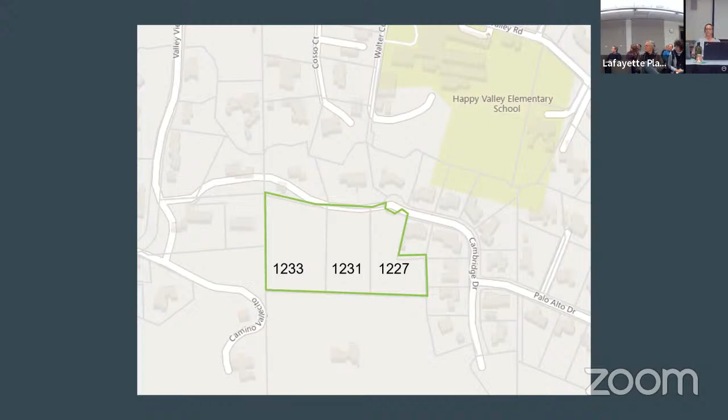Next slide. The first, westernmost site is heavily vegetated with large trees and shrubs, with a clearing towards the front of the lot, which is the north end. All development is proposed in this area at the north end of the lot, just off Cambridge Drive, and the lot slopes up from the roadway to the southwest rear corner.

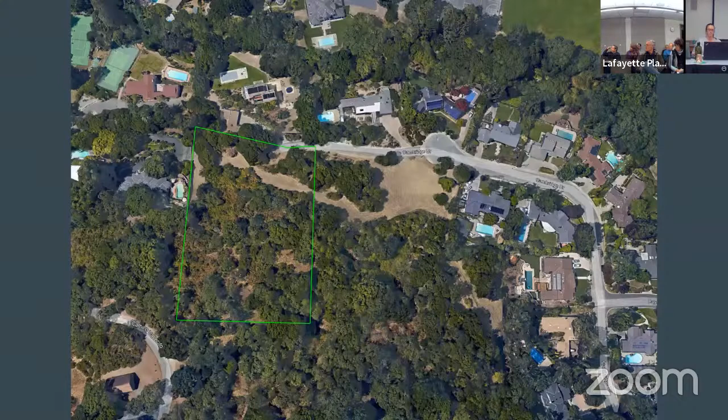Next slide. On this lot, the applicant proposes to construct a new 2-story, 4,637 square foot single-family residence with an 824 square foot semi-detached garage and a pool.

Also shown on the plans is a 780 square foot accessory dwelling unit, or ADU, which is not subject to discretionary review by the DRC and would be separately reviewed by staff once the applicant has received the entitlement.

Development is, as I said, concentrated toward the front of the lot, in a location which appears to have the least amount of tree removals required, and grading is minimized even though it is a hillside. The building placement also reduces the need to construct a very long driveway to reach the home, preserving as many trees on the site as possible. This orientation generally follows the contours of the site, which is recommended in order to minimize impacts to the hillside.

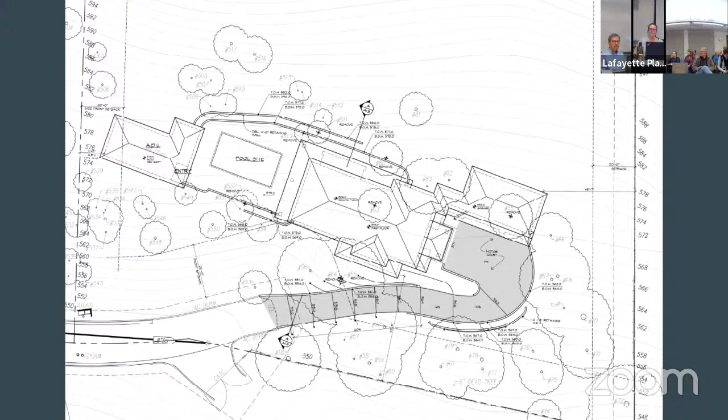Next slide. The development would require the removal of 8 trees, all of which appear to be protected species. On a vacant lot, any tree with a diameter greater than 6 inches is protected and requires a tree permit to remove. As part of the formal submittal, the applicant will need to submit a tree mitigation planting plan.

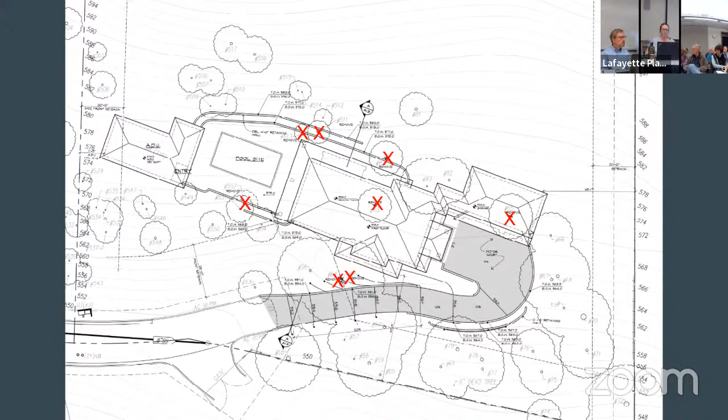Next slide. The applicant proposes a 2-story residence with 6 bedrooms and 6½ bathrooms. The first floor includes 1 bedroom, 1 full bathroom, and a powder room, in addition to the kitchen, dining, and family areas. Next slide.

On the second floor are 5 bedrooms, including the primary suite, with each bedroom having an ensuite full bathroom. The second floor is stepped back for much of the perimeter, which reduces the mass of the second story.

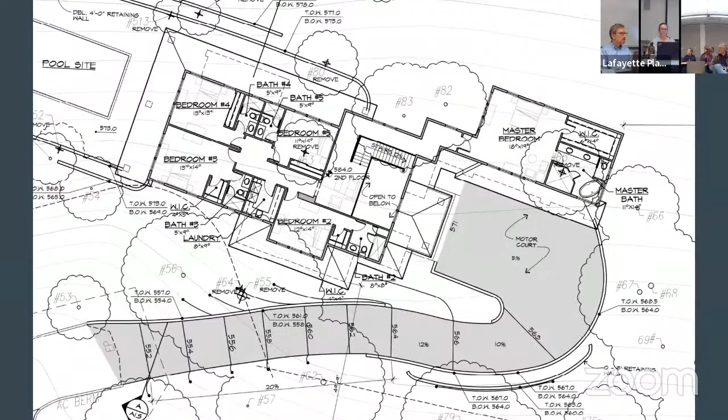Next slide. The apparent maximum ridge height is approximately 35 feet, calculated from this site section. That is the maximum permitted in the R40 zoning district. But with the formal submittal, the applicant would provide full building elevations, which would more clearly demonstrate the building's height and how the massing is broken up.

Although the second story is stepped back along the facade, as you can see in this site section, the building may still appear quite massive when viewed from the roadway due to the slope. Efforts to reduce the apparent massing should be made, and the applicant should also include trees for screening in their landscape plan.

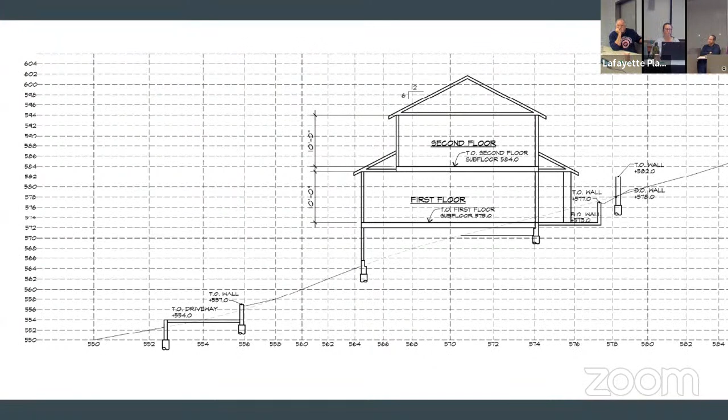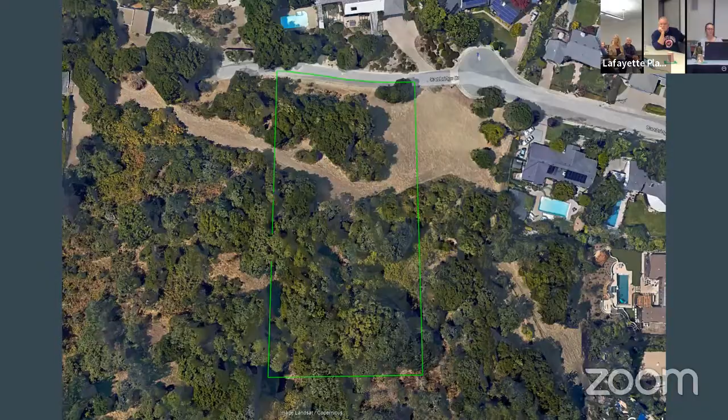I will now move on to the next parcel, SS0423. 1231 Cambridge is the middle of the 3 vacant lots. It is also sloping up from the roadway and is heavily vegetated with a clearing toward the front of the lot. Next slide. The proposed development includes a 2-story single-family residence of 4,329 square feet, plus a 615 square foot attached garage.

Also shown on the plans, similar to the one we just viewed, is an accessory dwelling unit, which would be subject to staff review at a later time. Construction of the driveway will require terraced retaining walls at the front of the property, and staff recommend including vegetation for screening and visual interest in the final landscape plan.

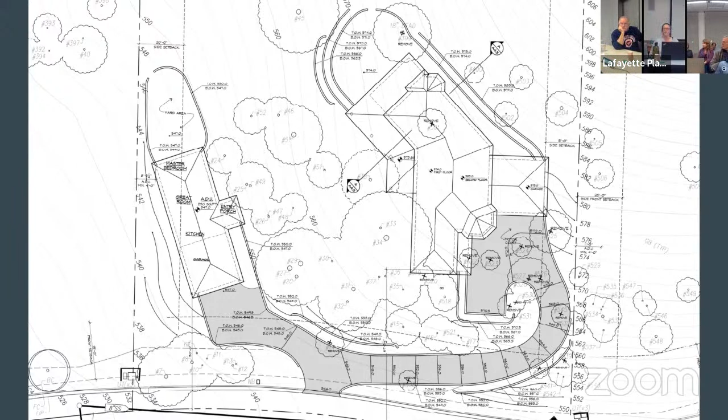Next slide. The proposal also requires the removal of approximately 15 trees. Some of these trees may be under 6 inches in diameter, and therefore would not be protected species, but an arborist report will be required along with the formal submittal, which would detail the condition and size of each tree in the vicinity of proposed construction. This would also include recommendations for retention of other protected trees on the site.

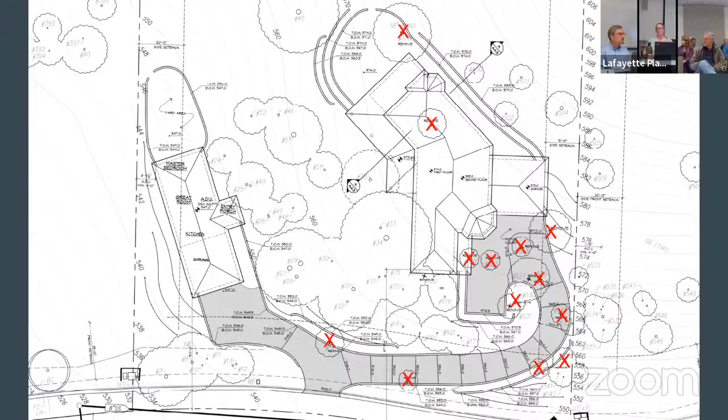In general, the siting of this residence also preserves as many trees as possible. It is a very heavily wooded site, and it does fit the existing contours of the site. Next slide.

The first floor includes an attached 1-car garage and a separate attached 2-car garage, as well as laundry, kitchen, living, dining room, 2 bedrooms, and 2½ bathrooms.

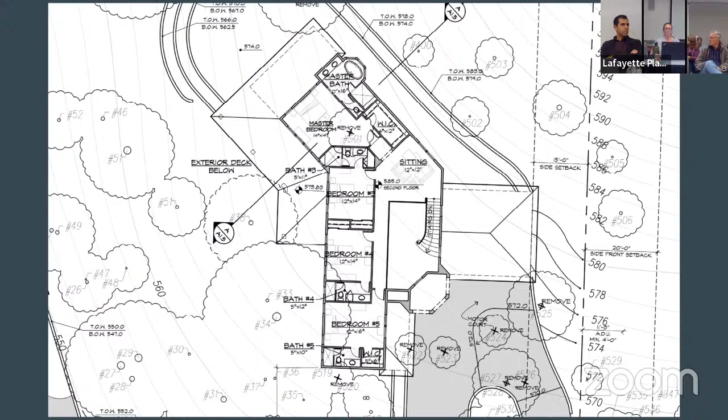Next slide. And the second floor proposes 4 bedrooms, each including a primary suite with a full bathroom as well. The second floor is stepped back, but at the rear of the residence, as well as over the 1-car garage. Staff recommendation is to explore ways to step back the mass at the front left corner of the residence, which is closest to the street, Bedroom 5 as shown on the floor plan, as that has the higher potential for visual impact when viewed from the roadway. Next slide.

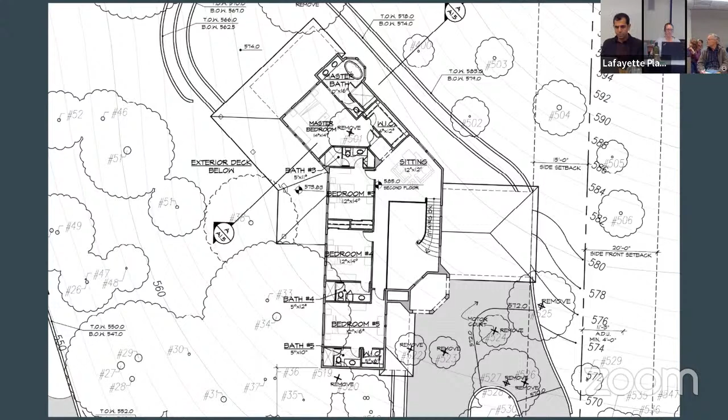This site section of the rear half of the house shows the maximum ridge height to be approximately 28 feet. This is consistent with zoning regulations, which limits it to 35 feet. However, the height will be more clearly shown in the full elevations when those are submitted along with the formal project submittal. Additional site sections may also be necessary for the driveway and parking area of the residence and to demonstrate the grading and slope in those areas.

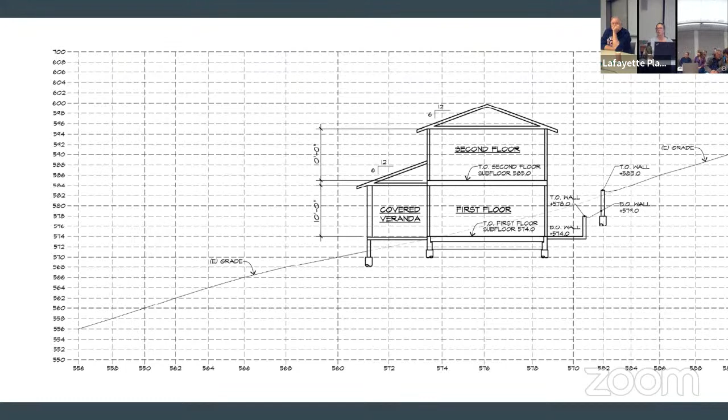Next slide. And finally, we have 1227 Cambridge. You can go to the next slide. The easternmost of the three lots. The northern portion of the site where development is proposed has relatively few trees and is fairly flat in comparison with the southern uphill portion of the lot. There is an existing curb cut for a driveway off the cul-de-sac of Cambridge Drive. Though the applicant proposes a new driveway entry to the west, I believe tonight, as part of their presentation, they may show an alternate driveway location as well from the cul-de-sac.

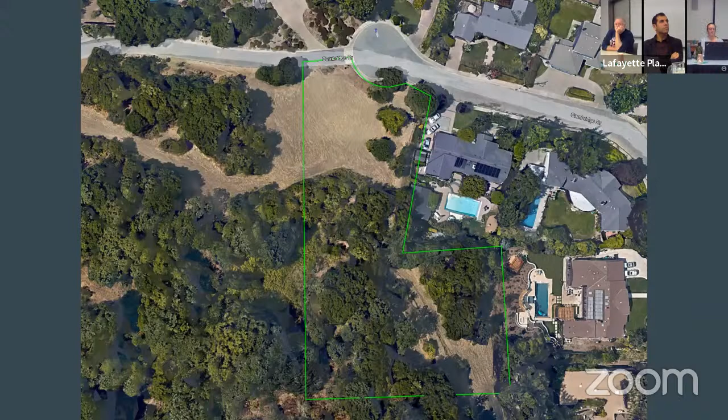Next slide. This proposal is to construct a two-story, 4,739 square foot residence, an 804 square foot attached garage, and a pool. An ADU is also shown in the rear yard of the residence, and this ADU will be subject to staff review once the project has the entitlements.

Of the 3 study sessions presented tonight, this residence is the closest to homes along Cambridge Drive, the public roadway portion of Cambridge Drive. It has the potential to appear more massive in relation to its surroundings because the homes to the left in this image, but that is to the east, are smaller lots with smaller homes, while homes to the west are larger lots with larger homes.

Staff would like to see the applicant reduce the scale of the proposed residence to create a transition area from these smaller lots with smaller homes to the larger lots to the west.

The project appears to only require the removal of 2 trees, and depending on their size, they may be protected species. The applicant proposes to install screening trees along the property frontage as well to create visual screening.

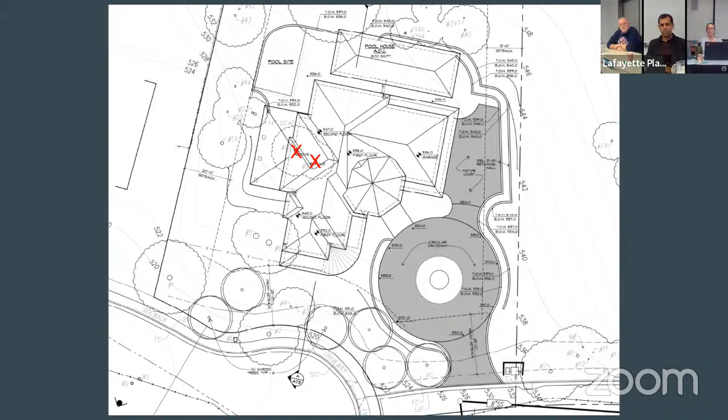To minimize grading to create the circular driveway as well as reduce privacy impacts, staff recommends the applicant explore relocating the garage to the front of the residence if possible. This would shorten the driveway and reduce the amount of windows overlooking the front property line.

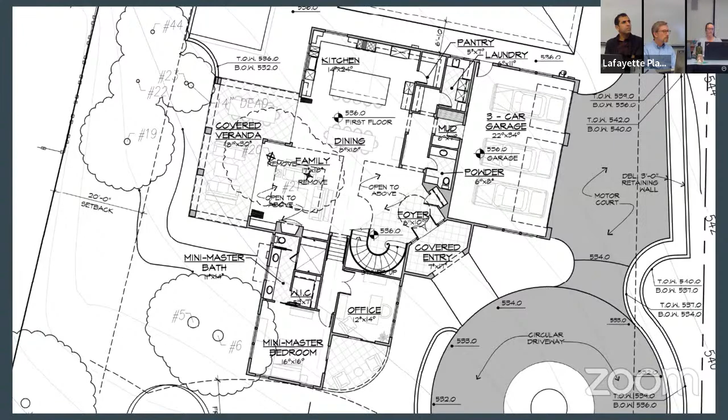The first floor includes a 3-car garage, an office, 1 bedroom, kitchen, dining, and living areas, as well as 1.5 bathrooms, while the second floor plans include 4 additional bedrooms, each with an ensuite bathroom.

Staff estimate the maximum height of this residence to be 35 feet based on this site section. But again, detailed building elevations will be required to determine the actual height.

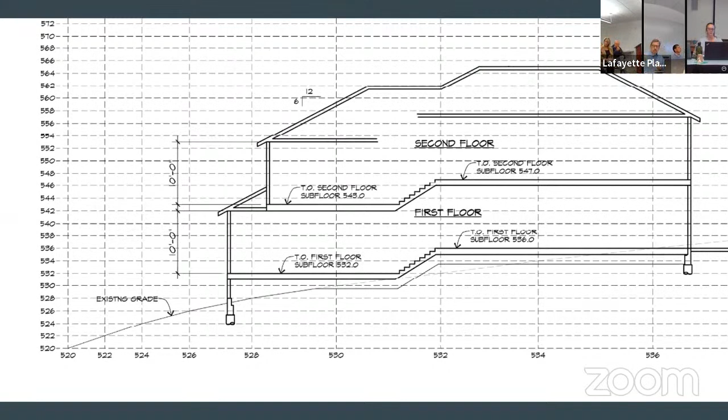The residence may appear very tall in comparison with the surrounding homes, given the slight slope at the front of the lot. Staff recommend reducing the apparent mass through either reducing the overall area of the second floor, adding more trees for screening, including additional architectural elements to add visual interest, or a combination of these actions.

Staff received 3 written public comments, which were published with the staff report. Common concerns regarding all 3 properties include drainage and slope stability, history of poor drainage in the area, the overall size of the proposed residences and whether they are in scale with the neighborhood, the desire to preserve as many trees on the site as possible, and concerns regarding emergency vehicle access or evacuation via Cambridge Drive from the additional development.

Staff expect the following permits will be required to process a formal application. The hillside development phase 1 and phase 2 will be required. Phase 1 is a siting and massing determination with the Planning Commission, and phase 2 is design review with this commission, DRC. This is because the property is a vacant property in the Hillside Overlay District, and that is the process for vacant lots.

Also likely to be required is a grading permit if they propose to remove, add, or grade more than 50 cubic yards, as well as a tree permit to remove any protected trees on the sites.

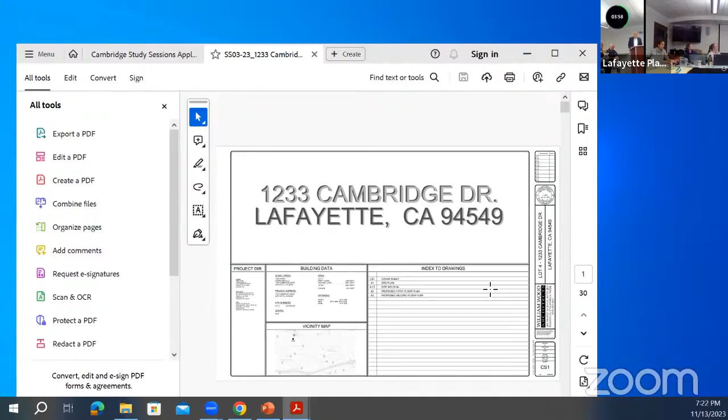There we go. So you'll see there are quite a few trees between the property line and the driveway. There's also a limit of 15% grade for a driveway for the fire department. So it's a delicate balance to get up to the building site, leave all the trees on the downslope of the property in front of the house, and use the driveway to help screen the house with existing trees.

Most of the trees around the perimeter are smaller trees, and I try to keep as many of the larger trees as possible. There's one tree where the garage is, and another right by where the driveway comes up to the main part of the house.

We didn't anticipate anything like ADUs at this point, but we're looking at possible sites for an ADU. I know the ordinance allows staff-level approvals, but it's important for neighbors and design review to see that if you're going to put an ADU in, you can make it a condition of approval where it's located. Many times when you come with an ADU you get free reign of where you put it in the backyard or side yard, as long as you meet the ordinance requirements. We only did this to show approximately where an ADU would likely be and what the size limitations are.

Lot 4 has the square footage currently proposed, or at least shown on the plan, reduced down—of course you'd get more space, and there might be a couple of trees you could save. Currently it's 4,600 square feet, and the FAR on lot 4 is 4.4%.

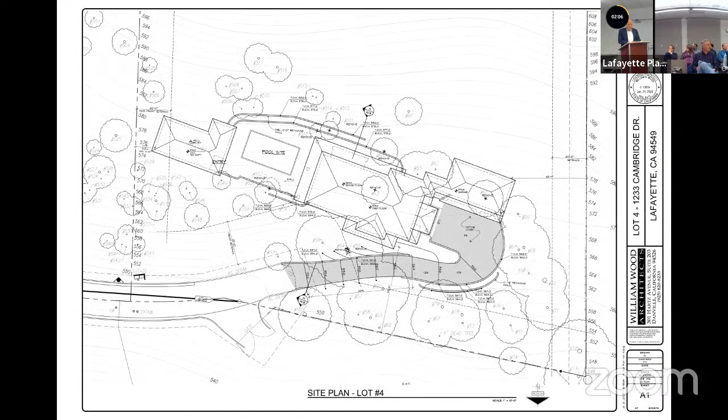What we try to do is look at the properties right across from those homes and compare the FARs so we stay under what their FARs are. Lot number 3, across from this property, is about 5.1% FAR, and we're staying at 4.4%. The lot across from us is 60,000 square feet, and this lot is 104,000 square feet, so we're at 2.5 acres—about 25% less FAR than the house right next door.

Other than that, it's more of a linear design, basically following the topography, so we're trying to minimize digging into the hill. All drainage on these homes will be designed through a civil engineer, with a soils report and drainage and grading plans—but most importantly, what the offsite effects are on drainage, since there's a lot of concern in the neighborhood. This last rain season showed up a lot of problems we haven't seen in 15 years because of the drought.

So I want to address all those items as well. You have 1 minute left. Sorry, since we are covering 3 items, it makes sense to add more time for the applicant, so take your time if we can add to the presentation time, if you need more.

Well, I will go through each one and give you a brief description of each, and then we can go back and discuss any one of those floors, and same with the neighbors. I've got extra copies of the plans, reduced sets, if somebody wants them before they leave, so they can look at it as well.

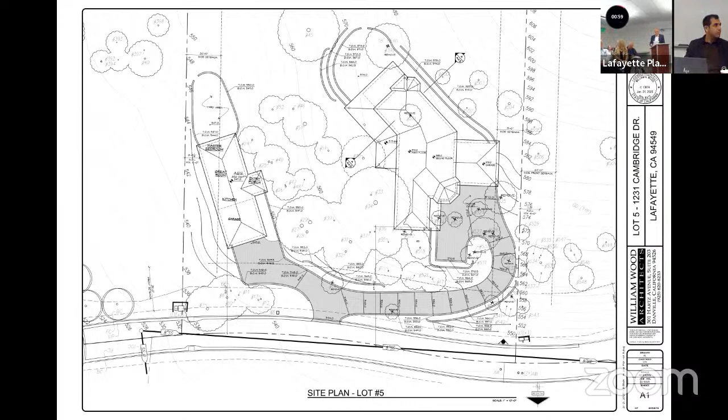And so that's lot number 4. Lot number 5, which is the middle lot. On the context map, lot number 5 is pretty much across the street from the Greenbergs.

The FAR that we have on this lot is 5.7%, with 75,000 square feet, about 1 acre and 2/3, or 1 acre and 3/4. There's a clearing on this one as well, where the house location is, with a lot of dense trees between the private road and the home. FAR for the Greenbergs is 6.6%, with 54,000 square feet, about 1 acre and 1/4. And we've got about 1 acre and 3/4 for lot number 5.

The square footage on this home was 4329. If you look at the plan, it's there. The driveway again goes up transversely with a slope to keep the driveway slope as minimum as possible, and maintain the distance for the fire truck to go up that driveway.

And then you need 150 feet around the house. Now, a lot of homes over the last 40 years don't meet those requirements, because the statute hadn't been created at that time. But today's standards for fire truck access, they can go up 150 feet and back down, but they have to have no more than 150 feet around the house for the fire hose.

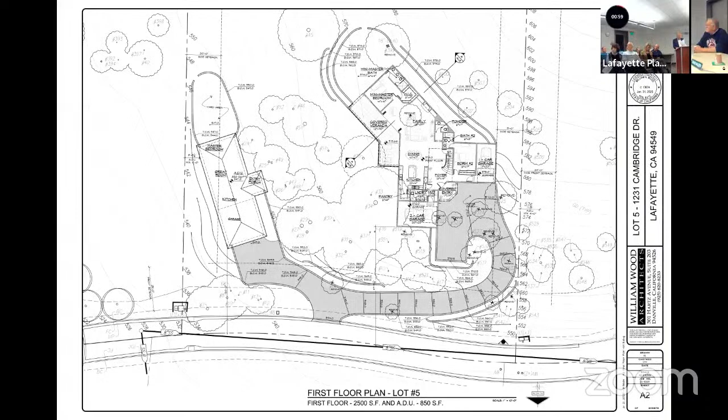And then on lot 6, which is the final lot, which is right down at the cul-de-sac.

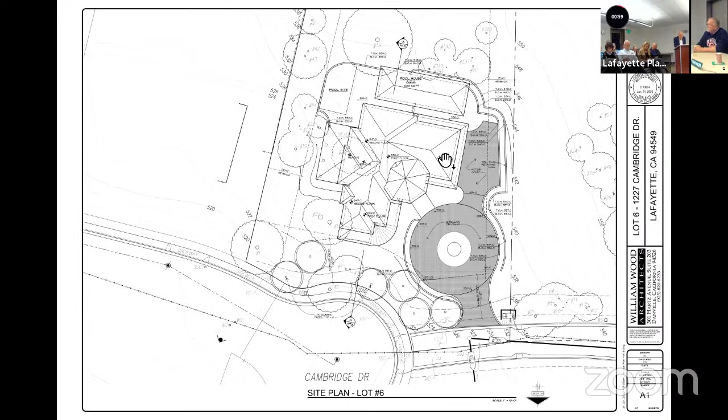I did an additional scheme for a driveway access on this. The FAR on this lot, lot 6, is 7%, and across the street the cul-de-sac is 9.5%. The lot across the street is 41,000 square feet, almost exactly an acre, and this lot is 67,000 square feet, about an acre and a half.

I have that alternate study up if you wanted to speak about it. There were two layouts for the driveway. The first one was the alternate driveway access. The Greenbergs requested that we see if we could come off the cul-de-sac and into the property that way. There are actually three ways to get into the property.

The one I've shown is pretty aggressive. There's an existing large oak tree in the right of way, adjacent to maybe only 4 or 5 feet away from the curb, and that oak tree is pretty massive. It would probably have to come out if we came in from the far end.

The grade at the building site is about 536, but the actual end of the cul-de-sac is at about 520. So you see it's about almost 15 to 16 feet difference in elevation.

To come in where the existing driveway is now would require a huge cut, and the distance you'd only be able to come up is maybe 6 feet at most, because there's not enough distance to get the height for a car up into the driveway. You'd basically have to build a bunker into a garage, like in the Oakland Hills, to do that. We proposed on our plan to come in off the private drive.

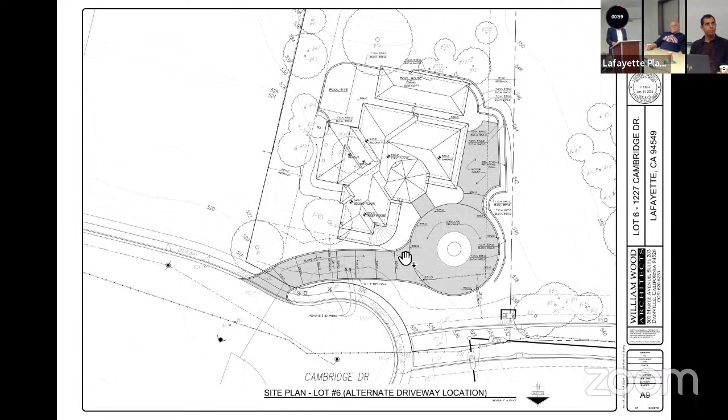So then you can see the driveway itself, and again it becomes about relocating the garage closer up, and how we design the final plan for the location where the garage goes.

But I want to assure that one thing is more important on these three homes than anything else: off-site parking doesn't really exist. I'm trying to get as much parking on site as possible.

You really can't park on the private road, and you can't park on the cul-de-sac. So you're going to have to retain any parking on site. Whatever we do, we want to try to maintain parking where the garage is going to go. If there's a turnaround driveway, I can maintain more parking, because this is a tough street.

Even the small street coming up to the cul-de-sac is tough for parking. So I want to try to have as much parking as possible on site while still maintaining minimum grading. It's kind of a hard balance, trying to maintain minimum grading while still getting as many cars on the property as possible without infringing on the neighborhood.

So you can see in this plan, we're coming in at about 530 elevation, and the house is at 534. So we're going up maybe 4 feet from the driveway to the main entrance of the house. It won't appear like the house is up two stories from the street, it'll be more of the same level as you come in.

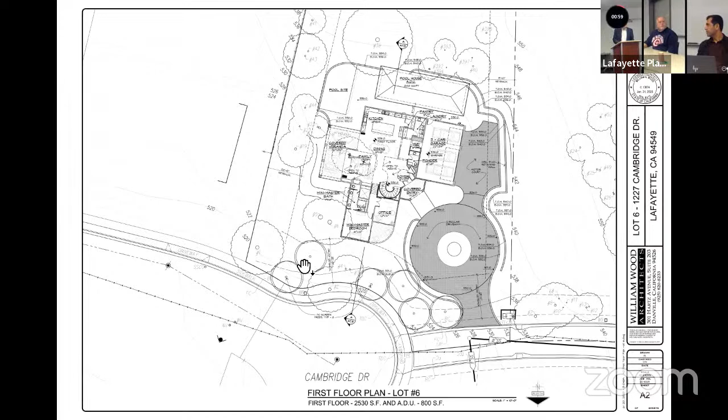Yeah, I have some questions. Can you go through the cul-de-sac on this lot - is that for the fire department's purpose because you don't have a hammerhead? Yes.

And on lot 4, you said there was a hammerhead - there was one put in there that comes into the end of the road. But that doesn't look like it's within 150 feet. No, but there's a hammerhead that's currently at the end of that. Can you pull that up again on lot 4?

Let's see, there's a 1233. Yeah, so this is the terminus of the private road, right there. If you look there, there's a gate - yeah, I see that. That gate unfortunately is left open permanently. The neighboring property, I guess, from what I've been told, that gate's supposed to be left open all the time because it was put in after the development, and the fire department is requiring them to keep it open because that's where their current turnaround is.

So from that point is the end of the hammerhead. From there, you can go up the driveway no more than 150 feet, and another 150 feet around the house - that's your limitation. And we're pretty much there already.

We're at about - and the fire department is willing to back down that grade? As long as we meet the requirements, the driveway at the top we're going to widen to a 28-foot radius as we come up, but they're maximizing the 15% slope. We can't push the house any further up because as we go up the hill, the slope gets 20 to 30% greater in steepness.

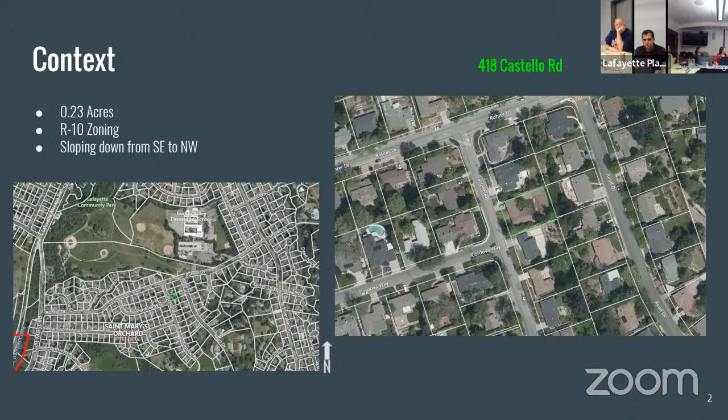This quarter-acre subject property is located in the southern portion of Lafayette in Burton Valley. The residence is at the intersection of Castello Road and Cordova Way. The subject parcel topography slopes down from the southeast to the northwest, and the existing residence is a one-story over garage home sited near the front of the parcel, as highlighted in green in the slide.

This project proposes additions to the existing residence, with architectural design changes to the exterior including new colors, materials, and added gable roofs. Site grading is proposed to accommodate the addition area on the main house and provide new landscaping and drainage at the rear of the property. This project triggers a design review permit because it is a structure exceeding 17 feet, and it triggers a grading permit because earth movement is over 50 cubic yards.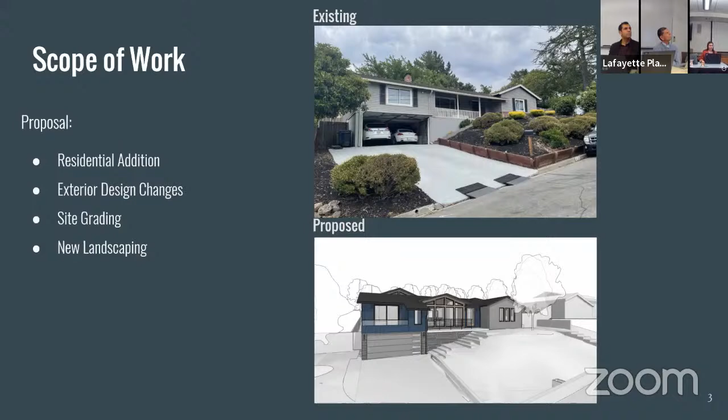So the proposed addition area is 1,069 square feet, totaling at the end of the project for a single family residence over garage that is 3,308 square feet. The addition area, as outlined in blue on the slide of the proposed site plan, will accommodate a new family room, new dining area, an expanded kitchen, as well as an expanded master bed and bathroom.

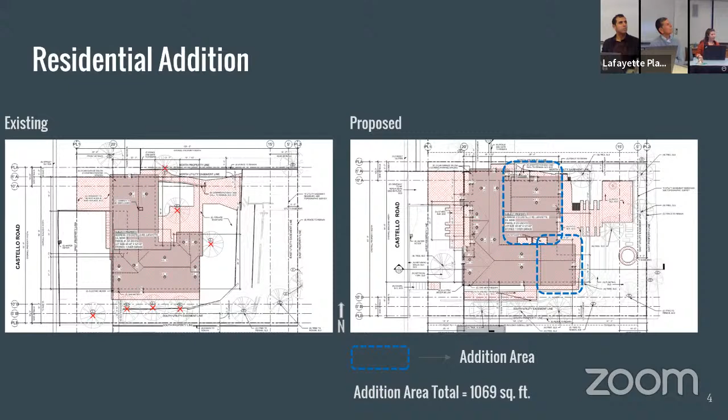Staff does find potential for off-site visibility from the light produced from the clerestory windows and has included a project-specific condition to have staff review the interior light plan that is proposed in order to minimize light filtration to the exterior. Slide, please.

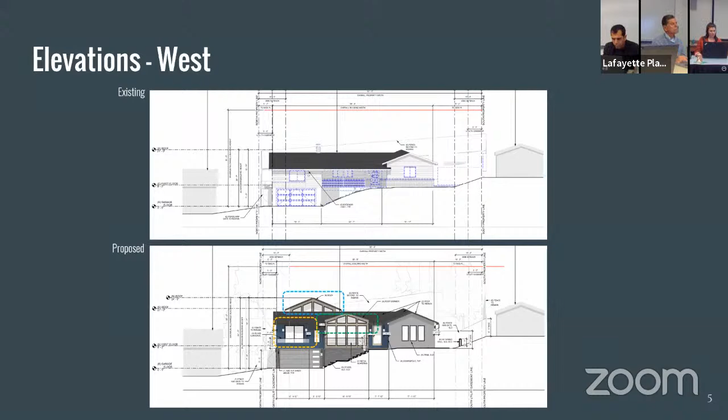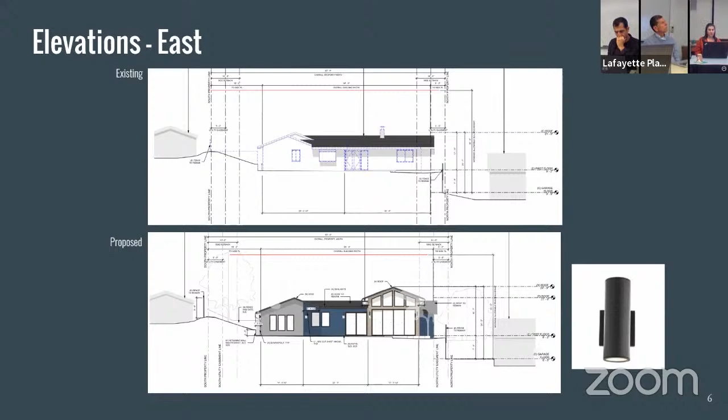Large rear windows and clerestory windows are proposed on the rear of the addition that will provide enhanced daylight into the living room, which is to the right, and the master bedroom, which is to the left. All exterior light proposed in this project is downshielded in order to preserve the night sky and diffuse the light visible from the exterior of the residence.

So the maximum ridge height of this residence increases from 21 feet to approximately 25 feet, which is allowed by the R10 zoning district regulation, which allows for a 35-foot maximum height.

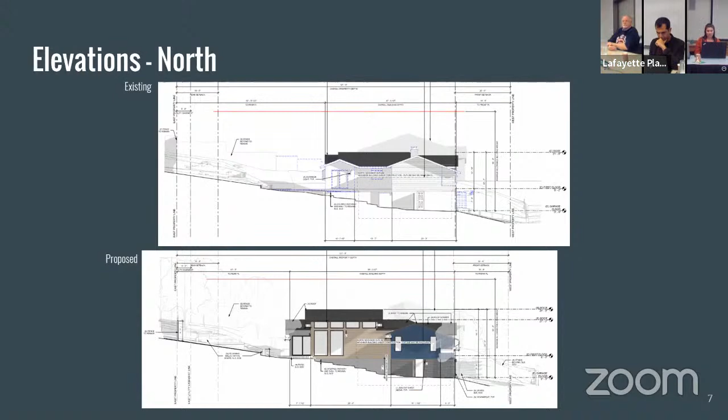Staff anticipates the new windows on the proposed north elevation shown in this slide will not impact privacy because these windows do face a garage that is downslope at the adjacent property to the north.

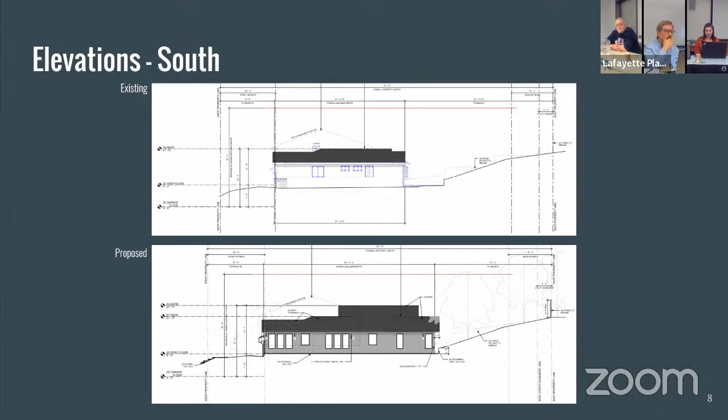The south elevation of the residence is screened by proposed tree plantings and an existing fence that will remain. The adjacent property to the south is also higher in elevation, so staff does not foresee any privacy impacts visible from this elevation.

Overall, this design proposal is a contemporary architectural style that staff finds is using materials that are keeping with the neighboring homes. Natural materials and predominantly dark painted and wood siding, along with neutral color stucco and a dark shingle roof, will help blend the residence into the surrounding site environment.

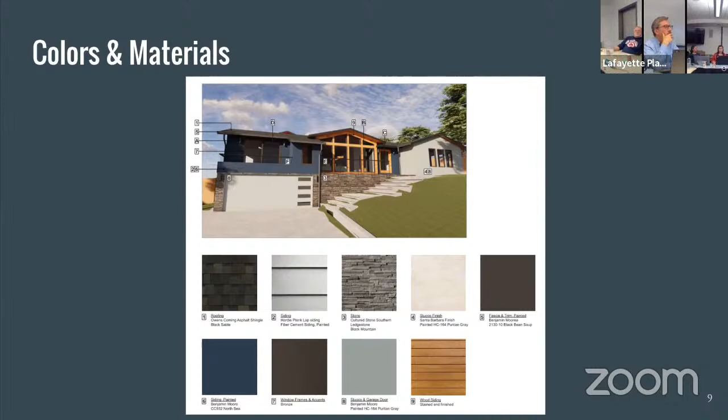The total earth movement proposed for this project is 200 cubic yards of cut, and this cut will establish a flat pad for the proposed addition and foundation. It will also accommodate new landscaping in the rear of the property that will ensure proper drainage on the site.

The geotechnical report demonstrates that the site is suitable for the proposed cut, provided their recommendations are followed, and staff has incorporated a project-specific condition in order to incorporate the geotechnical studies recommendations into the grading and drainage plans.

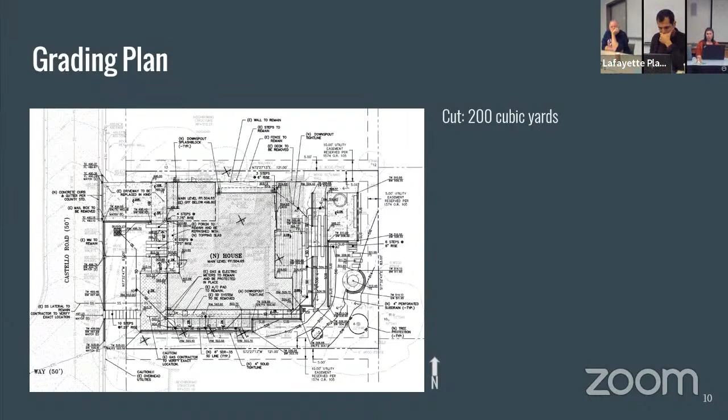The city engineer in their review also provided comments on the pop-up emitter in the front yard and reconciling the location of the retaining walls to the geotechnical study. These comments will be addressed by the applicant team during staff review of the construction drawings once approved by the DRC.

The proposed tree plantings, looking at the southern portion of the residence, will replace those that are removed and retain the screening of that elevation once matured. The proposed 5 new plantings in the rear yard will provide greater canopy and help mitigate the loss of canopy from the 2 trees that are proposed for removal due to the new addition area.

The new landscaping on the site is comprised of drought-tolerant plantings. On the front yard, there are decorative boulders, grasses, and low hedges that will be visible from the street and will provide a greater visual interest of the property.

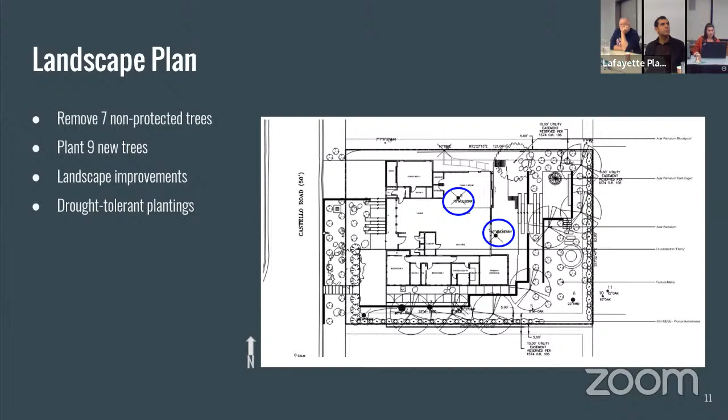The property owner had shared the plans with neighbors and received a support letter from the neighbor at 414 Castello Road, which is the southern next door property to the subject property. That comment letter was included in the staff report.

Staff did receive 1 public comment after publication of the staff report from a resident on Reed Road. Reed Road pictured in the slide is the road just east of Castello, and this resident did voice concern over privacy impacts to their home. However, staff and the applicant team have not received what address they are at on Reed Road after inquiry.

But staff would like to clarify that the proposed addition is not a second story addition, and the increase in ridge height from the existing is approximately 4 feet.

Staff recommends that the Design Review Commission find the project exempt from CEQA, adopt DRC Resolution 2023-21, and approve the project subject to the conditions attached in the staff report. And that concludes my presentation. I'm happy to answer any questions the commissioners might have.

We bought this house two years ago. When we bought it, we knew there were numerous issues. The house is dated. There are problems with the roof, with the foundation, and the front yard and backyard need a lot of work, and we want more space. But two things trump all these concerns: we love the neighborhood, and we love the spot of the house. So we bought knowing that at some point we want to rehab the house. Our vision is to extend the house, to modernize it, while fitting in with the neighborhood. I think the plan my architects put together achieved those goals, and we're excited to see our plan moving through the approval process and the project moving forward.

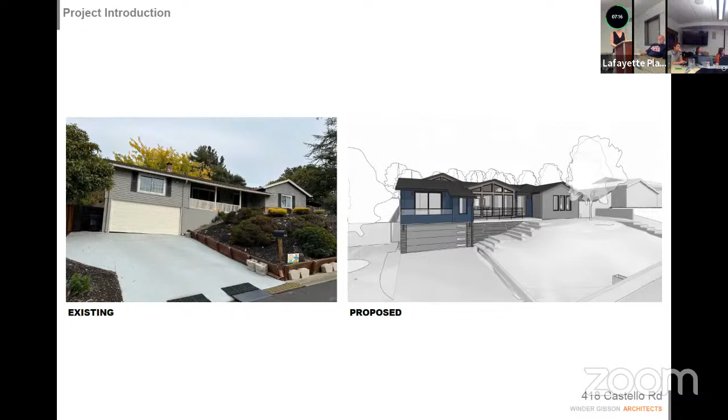As Nicole said, we need to remove two of those mulberry trees in order to allow for this addition to occur. In addition to this extension into the rear yard, we're also proposing to make two small cuts to the existing roof as shown in blue, and those will help create a more articulated front facade. Next slide.

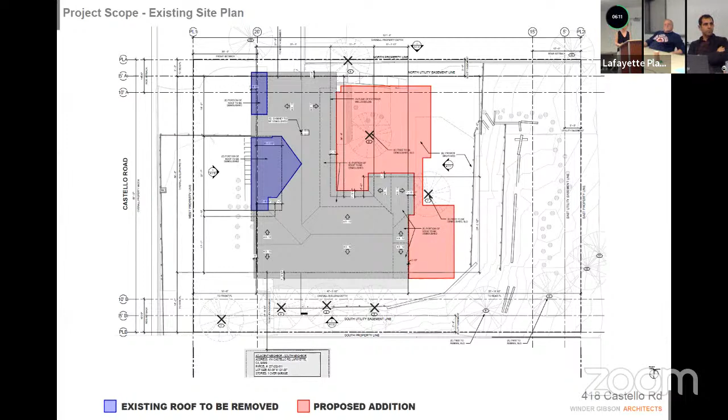So we tried to keep that living room location as far back from the street as possible in order to keep the massing of the home reduced from the street and seem less overwhelming. As Nicole said, this incredible space will have so much daylight throughout all hours of the day due to the pop-up and the clerestory windows all the way around the top. This pop-up also helps to break down the design into well-scaled pieces.

Our request for the grading permit is primarily to regrade the rear yard in order to provide a series of terraced patio spaces stepping up to the rear property line, and those would work naturally with the topography as they step upwards. By doing this, we'll allow the backyard to be better used by Gia's daughter, Esther, who's in the library right now, making the rear yard a little bit more useful.

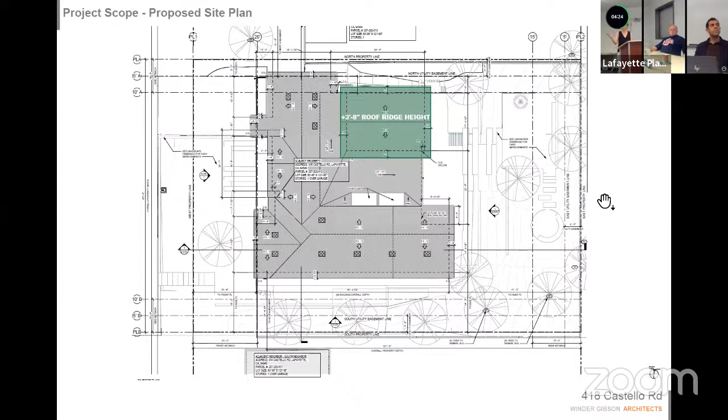Just for reference, that rear property line is about 8 to 12 feet higher as you walk across it from the first floor elevation itself. We're also proposing new landscaping throughout the property, which will help filter the view of the home from neighboring properties and from the street, and eventually help with privacy. Demir will speak a little bit more about that at the end.

You can see that the proposed has maintained a horizontality of the existing home, but with the addition of the new gable at the front, this really helps brighten up the entry, which is currently under that dark existing front porch. These minimal gestures that we've made with the cutout of the roof on the left and this new dormer in the middle over the entry really helps to create this really beautiful fractal pattern to the front of the home that doesn't exist right now, and makes it a lot more inviting and friendly to passing by.

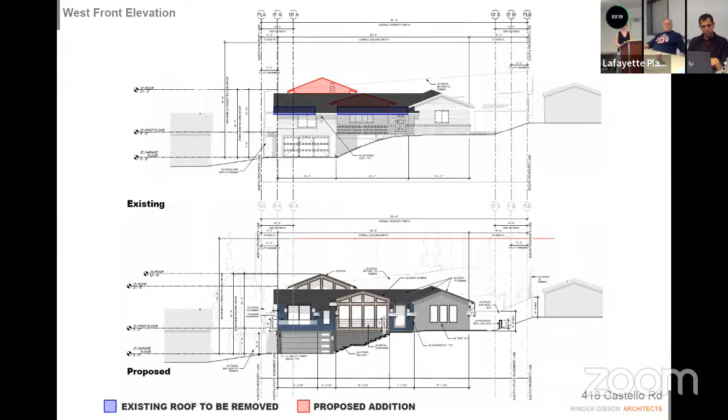I also like that it allows the home with its profile to kind of gently nod its head to the ups and downs of the hills around our property.

Next slide. For the east rear facade, the massing remains almost identical compared to the existing, with the minor living room addition on the right and the pop-up roof above it. The primary suite will extend directly out from the existing side on the left of the building, and that will extend directly into the backyard.

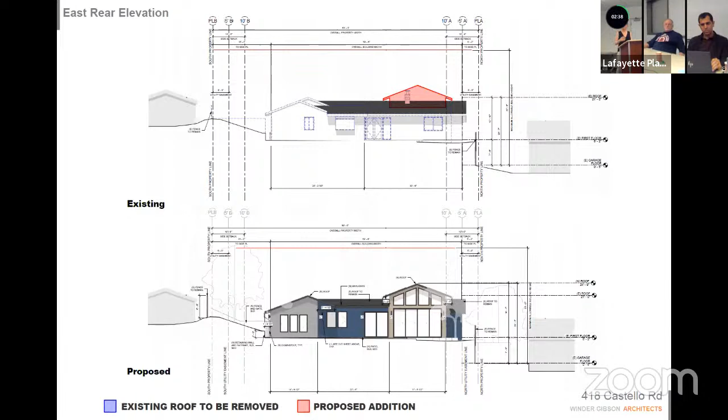You can see here that we're also proposing larger door and window openings. That will not only create enhanced daylighting on the inside, but I think it really helps to give a better proportion of exterior material to glazing throughout the home and make it more friendly and inviting.

Next slide. On the north side, you can see it also remains almost exactly the same. The garage in the lower right-hand corner will remain in place with the new living room extension and primary suite into the rear yard on the left.

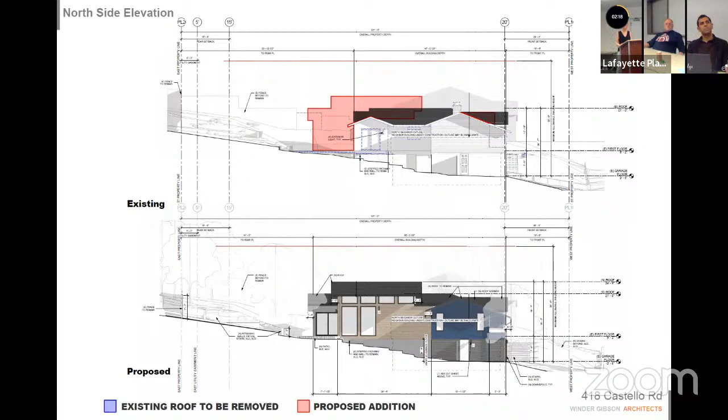Next slide. For the south side elevation here, you can see that the walls and roof generally remain the same, except for our primary suite extension into the rear yard on the right.

You can also see here, it's kind of where the timer is on the right, so the hill really does step up significantly into the backyard. Looking at that comment from that one neighbor that submitted it today, it really is way up significantly higher. Our addition kind of sits below the top height of that fence on the far right-hand side, just below it if you were to draw a line across the page.

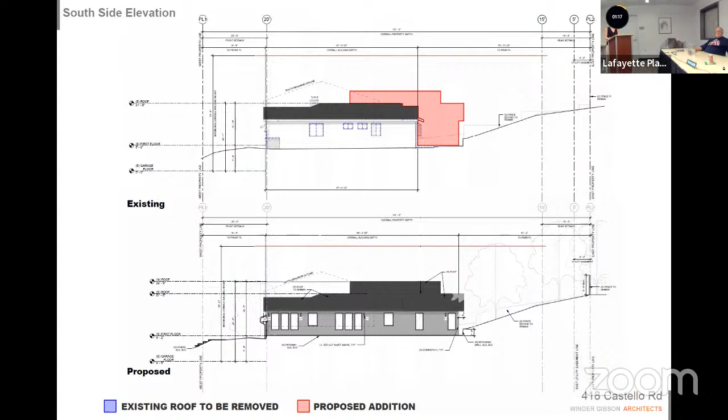So you can see from these elevations that we really are adhering to the general massing of the existing home, but with these few changes that we're proposing, it really helps let the existing home breathe and brings in a lot of reinvigorated life. Next slide.

For the existing material palette, we're proposing to modernize the aesthetic of the home and make it more fire resilient with the new materials. We're proposing stucco, wood-like fiber cement siding, and natural stone anchoring the garage level base. These new materials are very similar to the existing materials within the neighborhood, but they have a lot more of a modern twist.

The new roof material will be an asphalt shingle tile to match the existing, which is also consistent with the neighborhood.

I have 40 seconds. Well, next slide. Nicole and I have done really well, so I don't have to say very much. We have one more.

Go with it. The landscape—my name is Demi Herdich, I'm a principal of design at DHD, Demi Herdich Design.

The landscape approach for this project is really simple and sensitive. In the back, we're focusing mostly on planting a hedgerow against the property line to help prevent light pollution to the neighbor behind, and replacing a number of Japanese maple trees, which are relatively small trees that create both shade and additional screening for the back and side neighbors. We're replacing the two mulberry trees with three trees placed on the side that essentially screen the left side of the property.

And the front is very simple—mostly grasses, sensitive and open and welcoming, so it fits nicely into the neighborhood.

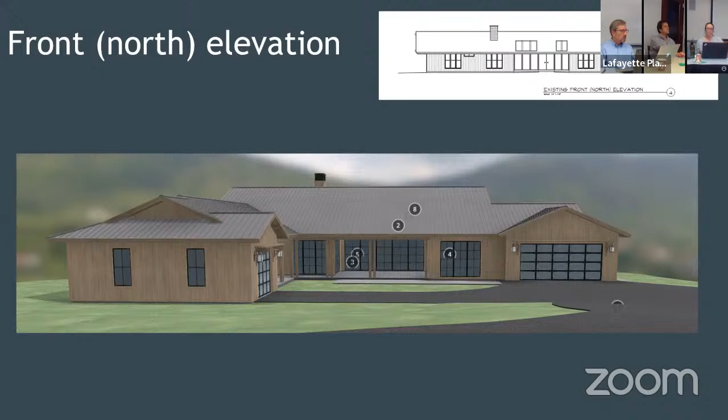The new design incorporates more varied roof lines, and the gables at each end create symmetry. The existing elevation is shown in the upper corner. The single car garage opens parallel to the street, which improves the view from the street. Not shown in the renderings is existing and proposed landscaping, which will add visual interest and create screening for privacy. The existing residence is not visible from the street, and the proposed residence will not be highly visible from the street either. The chosen colors and materials help it to further blend in with the environment.

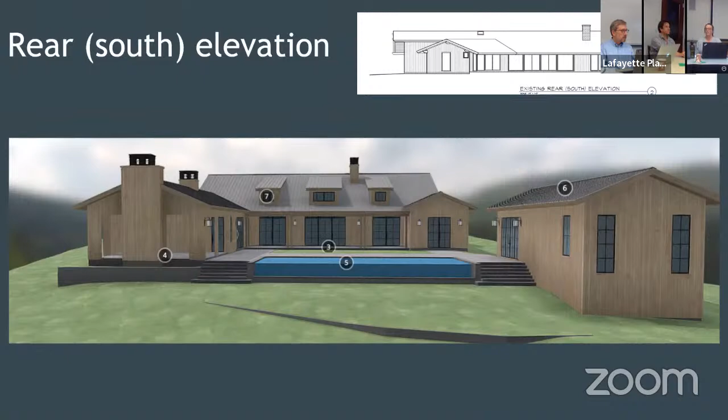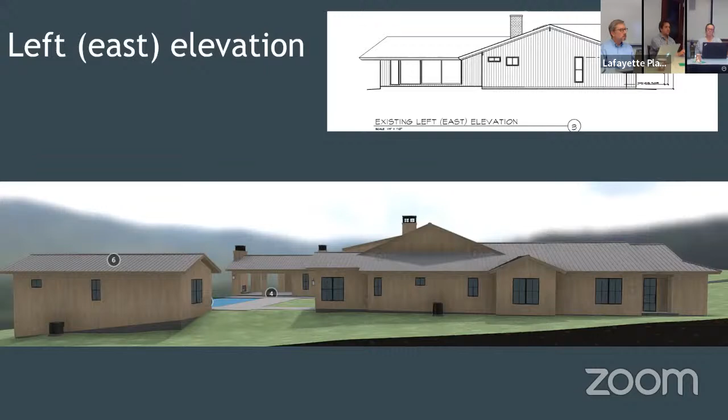At the rear, dormers have been added to break up the roof line, and gables continue the symmetry of the facade. The covered outdoor living area is shown to the left, with the detached guest suite shown to the right. These together create a courtyard style outdoor area, which reduces privacy impacts both to the homeowner and neighbors. Bump outs and recessed areas along the east elevation break up the mass and add shadow relief, and existing and new vegetation will also offer screening.

Similar bump outs, recessed areas, and varied roof lines with gables along the west elevation also add visual interest and shadow relief to the design.

The residence will go from 3 bedrooms, 2 bathrooms, 2 powder room baths, an office, and a 2-car garage, to 3 bedrooms, 4 1/2 bathrooms, an office, an outdoor covered living area identified on plans as a loggia, and an additional single car garage. The accessory building to the rear will include a guest bedroom and bathroom, as well as a home gym. This is not an accessory dwelling unit as it exceeds the height maximums to be classified as such, and it also does not contain a kitchen.

No public comments were received by the noon deadline today. Staff did receive standard comments from referral agencies Central San, ConFire, EBMUD, the city engineer, and the city landscape consultant. These comments do not require significant revisions. Any requirements can be addressed during the review of the construction drawings. The applicant will need to submit final permit drawings to Central San, ConFire, and the city engineer for approval during that phase.

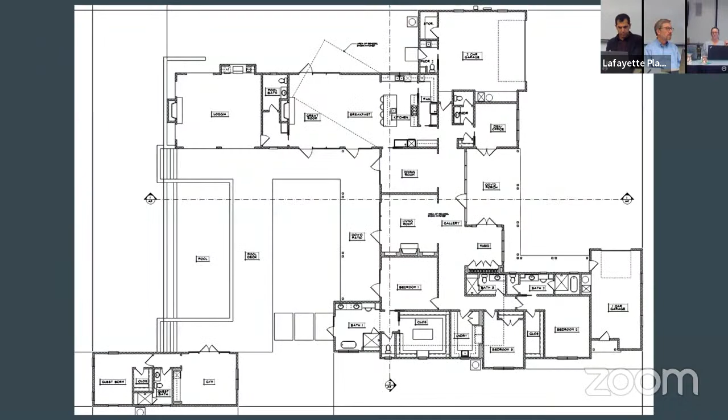So a related question: along the front, on the Happy Valley Road frontage, there's solid fencing and a solid gate all the way along there, and I didn't see any changes to that. Am I correct that it stays the way it is? Yes, as long as the gate and entry are reviewed by the fire district, and usually existing is allowed to remain. If any changes are required, the fire department will let them know.

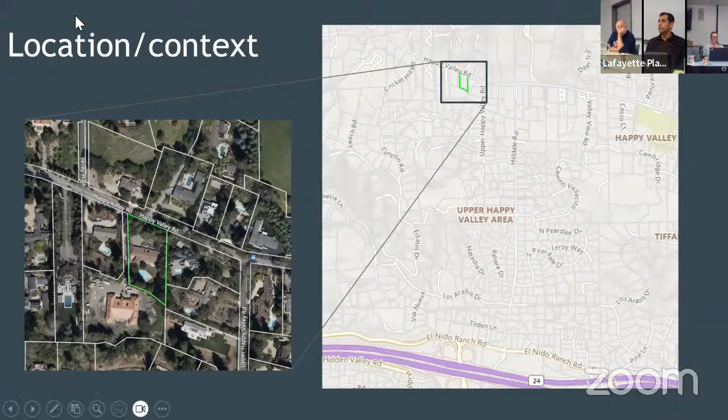Any more questions? No? Thank you. So with that, we are going to move to the applicant for presentation. Introduce yourself and your relationship to the project.

My name is Mark Penny with Talon Design, here on behalf of the owner, and also here with Alan Page from Talon Design. And Anna, nice to finally see your face. We emailed a lot, I don't think we've ever met.

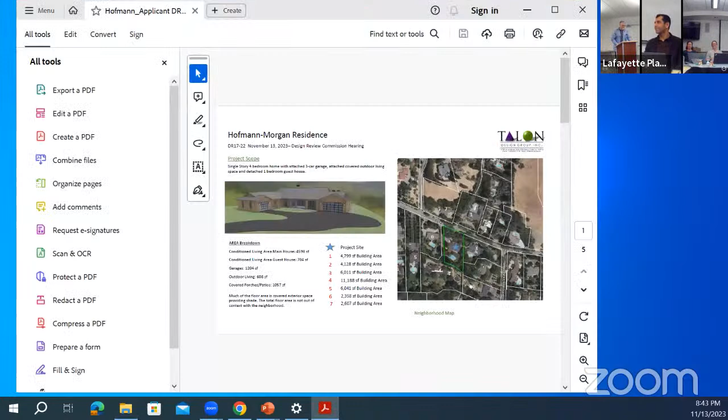So as with the last one, staff's presentation was pretty thorough. I have a few slides prepared. I'll run through pretty quickly, and then we can go to questions.

The first slide is just about context. We're looking at the other homes in the area, and as Anna said, there's quite a variety of size, but the size we're proposing is not unprecedented in the neighborhood. The house directly behind the new build is quite large, around 11,000 square feet. There's another house over 6,000 square feet. A lot of our area is in garages and outdoor covered spaces as well, so it's not all conditioned living space. We feel contextually we're not out of context with the neighborhood. We're well within the reasonable range.

And in terms of scale, just again, keeping it single story, the site had room to grow to accommodate the owner's program. So rather than building up, we spread out a little bit and tried to do it sensitively, maintaining lots of buffers around the property, which you'll see on future slides. Next slide, please.

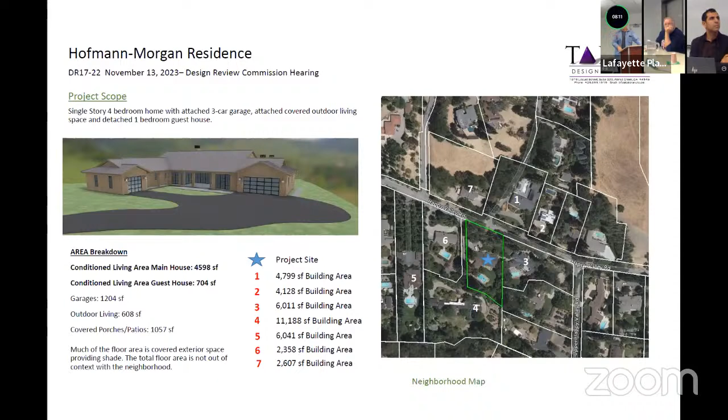Particularly from the street—if we could just go back to the front view again, sorry, back one slide—it doesn't present itself from the street as a large house. A lot of the wings go further back. So from a neighbor's perspective, there's a lot of trees on the side yards. We think it doesn't impact the neighbors, and from the street it still reads as quite a modest home. Okay, next slide, please.

Yeah, sorry, it's hard for me with my glasses. They're trifocal, and I'm trying to read my own comments.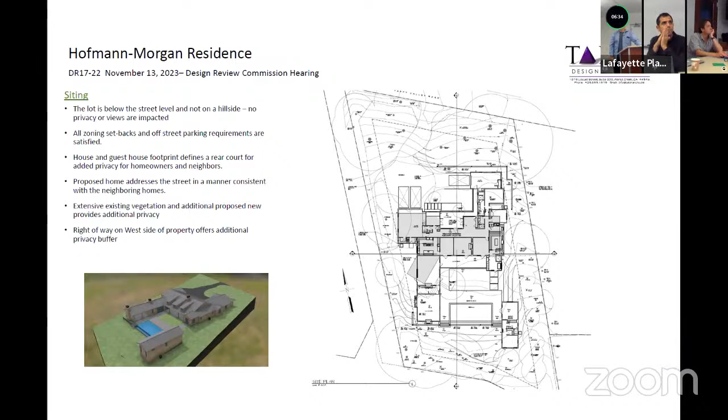Next slide, because I can't really read what I wrote.

For landscape, as was mentioned, there is a protected tree coming down, but we're putting in mitigation planting. As you can see, there's a lot more additional planting for additional screening, particularly around the guest unit to minimize the wall height there and have it feel more settled into the landscape.

A lot more planting and colors, right? Material palette, as you can see in the model, all the stone walkways, pool deck, and everything would be bluestone, metal roof, natural cedar siding, and black for the windows and doors. Pretty simple palette, pretty contemporary, but still has a nice traditional feel material-wise, settling it into the site.

We're utilizing the existing footprint for the most part. The biggest extension is the outdoor room, then the detached cottage, and then the additional bedroom wing forward. But the body of the house is really in the same position, using the same foundation and the same subfloor at that location.

What's the flooring on the loggia? That will be slab on grade. And a good chunk of the bluestone, where does the bluestone occur again? That'll be in the loggia, the covered porches, and the pool deck. So it's a covering on a slab on grade. Correct, it's not a floater. No.

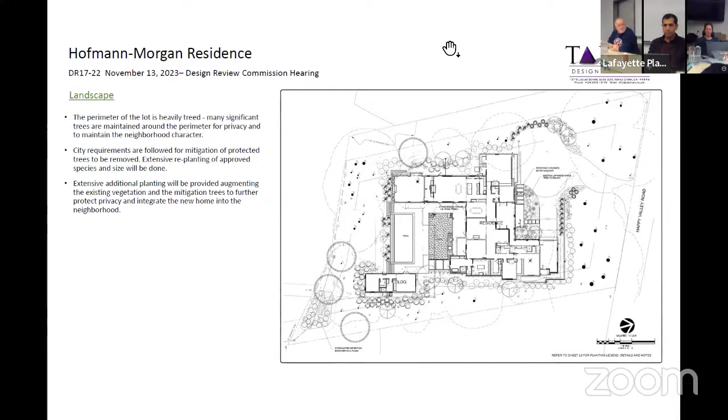Okay, with that, we are going to move to public comments. Do we have any raised hands? Anyone attending by Zoom can raise their hand at this time if they'd like to speak. If you're calling in, you can dial star nine. Seeing no raised hands, thank you.

So we are going to move to commissioner's comments. Who wants to go first? Well, I think it's a very nice design. I think it's a great example of how you could take a really large house and make it feel like it isn't large in that sense. The view from the front looks sort of normal size, normal massing, but it's broken up in a way that fits into the site very nicely. Overall, it's really nice, high quality design. I think it looks great. Thank you.

Yeah, it's nice design. I like it. I'm a little concerned about impervious areas. You got quite a bit, and I thought that after we hit 10,000, there was a special document that the city engineer requires, but I didn't see it in his comment sheet.

Yes, so the applicant is proposing a bioretention basin to treat all runoff from the site, and the engineer reviewed that. Okay.

You know, my comment is that's why I was asking about the loggia and stuff like that. You could have areas that are bluestone that aren't on a slab, and we would take some of that water away from the bioretention. Because the bioretention right now is in a sensitive area of tree growth, and they're not even sure that it's going to work. That's under review.